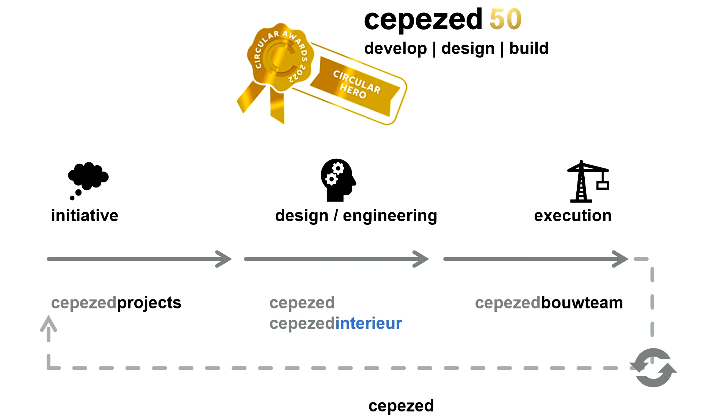And from the discipline of the architect, the designing engineer, we started to get involved in the initiative of the building projects, but also in the building of the actual buildings. So now we have 4 departments within cepezed. One is the project development, which I'm owner and director of. cepezed, the architectural firm, which also has an interior architecture department, and cepezed bouwteam, with which we actually build the buildings.

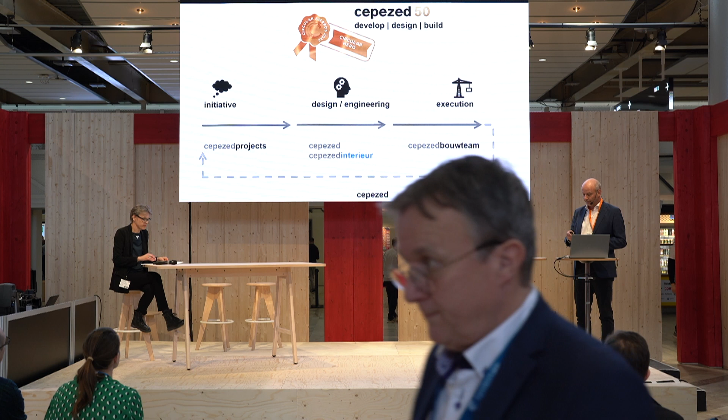And you see also by the dotted line that we start getting buildings that we realized, that we built, back to have new initiatives with them. And those are some of the projects that I'll show you later. We'll get back to that.

2 years ago we were called Circular Hero for that year by the government, because we are very intrinsically motivated to build circular buildings and to make the whole building industry more circular.

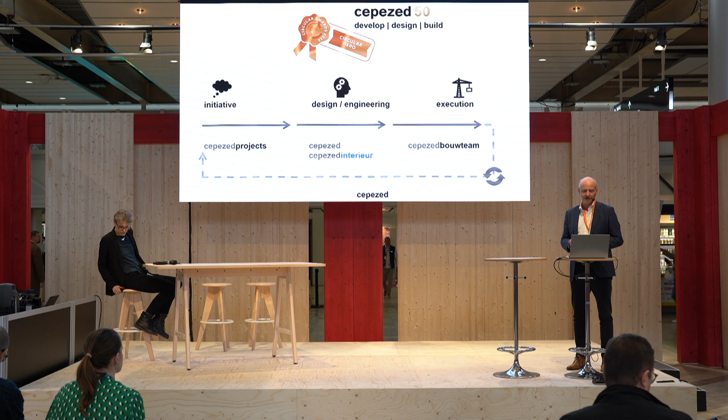I'm also a member of the transition team Circular Building Economy in the Netherlands. That's a team which advises the government how the building industry can become circular in 2050. It takes a lot of effort, but we have direct contact with the government, so we can have some influence on legislation, at least local legislation.

The urgency of why we have to focus on sustainability and especially circularity is displayed in this graph. This is for the Netherlands. I did not have the figures for Sweden available, but in the Netherlands, about 11% of all the CO2 emissions are caused by materials used in the building industry.

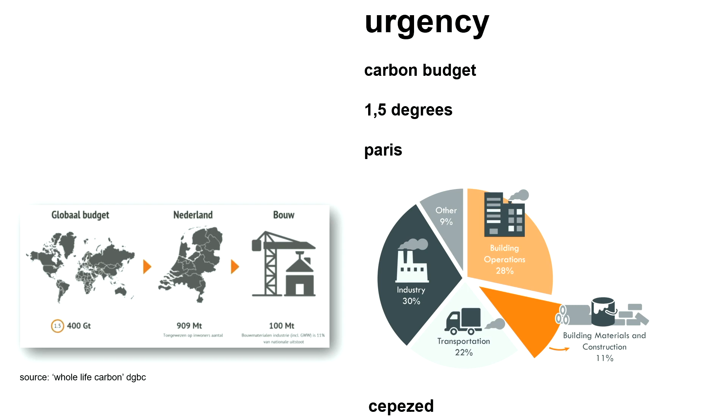So if you want to meet the 1.5 degrees goals of Paris, we really have to focus as a building industry on how we can reduce the CO2 emissions really drastically in the next decades. And one of the things that we can do to achieve that goal is to build more circular buildings, to get the circular economy within the building industry up and running.

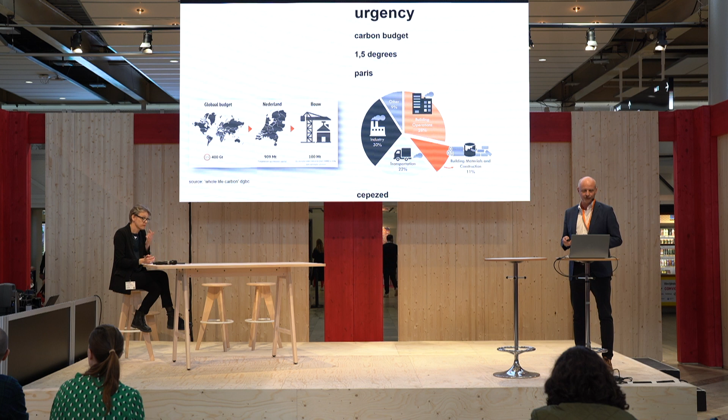I'm not going to talk about architecture itself. I'm going to talk more about how the process is organized for us to make circular buildings. I can talk a lot about the beautiful architecture of cepezed, how we make buildings with a lot of daylight, which are pleasant to stay in. But I'll focus more on the process of getting sustainable and circular buildings. So it's applicable to all different kinds of architectural aesthetics.

The definition of sustainability. This is the definition by the Brundtland Commission from '87, which is very logical, it's an open door. We have to meet the needs of the present generations without compromising future generations. So this is what we should keep in mind whether you make a vacuum cleaner or an airplane or a car or a building, always use this as a starting point for what you're actually going to make.

Do you make future generations happy with your product, or will it be a burden for future generations? So that's a very abstract way of thinking about how your business can be organized.

More into the building industry, we learned a lot from this guy, Stewart Brand. He's an American author who wrote this book about how buildings learn, how buildings get older, and how they get mature over time. And in this book, he has 3 statements which we find very attractive and we use in almost all of our projects. The first one is that all buildings are a prediction.

That means that you are always working in the future. If the client comes to your office, he probably has a program of requirements which was written 1 or 2 years ago, and you're making a design which will be built 2, 3, 4 years in the future. So you're always working with something that is a prediction as an architect or as a project developer. And that's not a problem, but you should realize that as human beings, we're not very good at predicting the future.

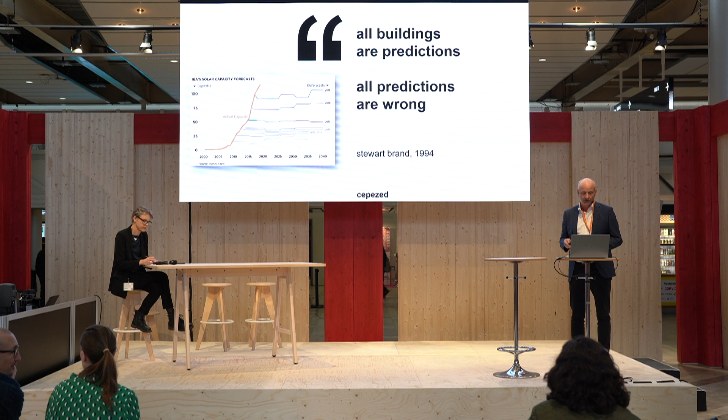I often show this graph, which you see on the left, where year on year the installed photovoltaic cells are predicted, and you see year after year after year it's the wrong prediction. So we should stop predicting and start making buildings that are able to adapt to the future, to future developments, which we don't know what will happen.

And one thing that is also standing in the way of that circular or sustainable development of the building industry is that a lot of buildings that we make suffer, as Stewart Brand calls it, from premature complexity. That means that they are in the initial phase already so complex that during their lifetime it's very difficult to adapt to different circumstances, different processes that will evolve in society. So just like any other organism, a building should start relatively simple and be able to get more complex and more mature over time. And that's something that architects nowadays are not too aware of when they design their projects.

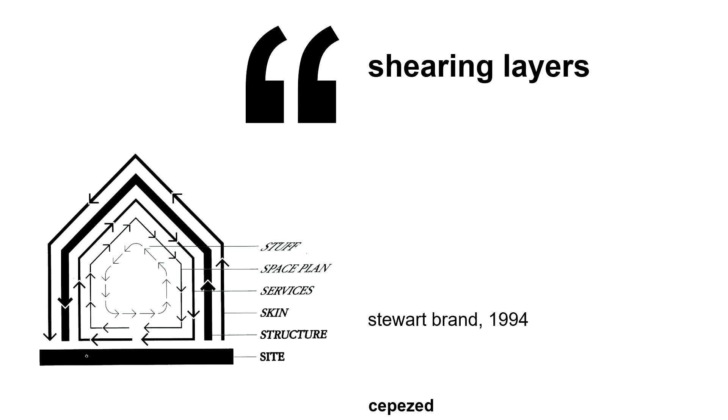The third one Stewart Brand mentioned is the approach when you design your building: you should approach it in different layers of time spans. So certain parts of your building can go on for hundreds of years, and other parts will have to be changed every 5 years, every 10 years, every 20 years. And all those different layers of your building, you should design them according to their lifespan and make sure that they don't interact too much, so that you have to tear down parts of the main construction to change your heating installation, for example. So really keep those different time layers apart.

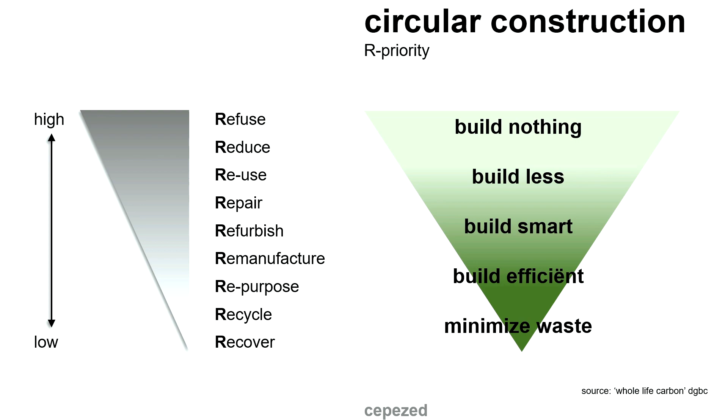So after you decided, do we have to build, or maybe you build nothing, can we build less, with less material? Can we build smarter? Can we build more efficient? And can we build to minimize the waste? So to also minimize the recycling potential.

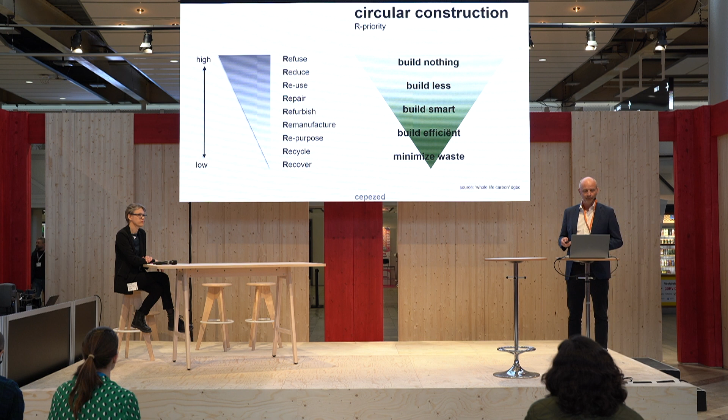But what we build are these kinds of systems, which are very efficient but are not very flexible over time. And we see a lot of these buildings that become obsolete in 20, 30, 40 years. And that's way too short for a structure that should last for hundreds of years. But most of the time, because they're not flexible, they become obsolete in a few decades. So you might say that they're also coming forth from our throwaway culture, where we make and waste our products. So we should get away from buildings that are just once usable in one life cycle.

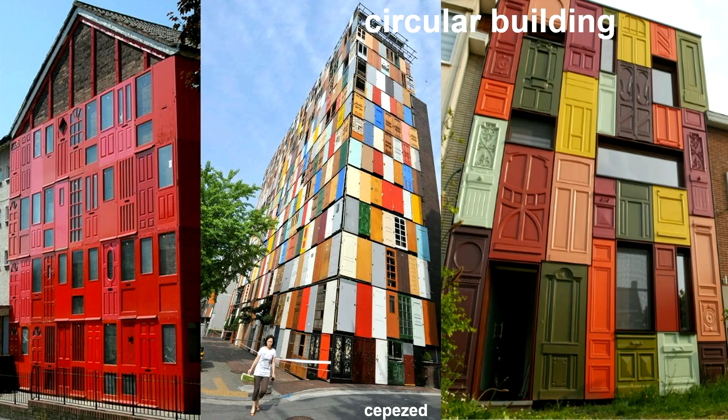When it comes to recycling, there are a lot of very nice projects which make use of old materials, but you should also not confuse this with circularity. These are not circular buildings. These are buildings with recycled second-hand materials, and that's different. I'll come to that later, why that's different from circularity.

And then you see what I just said, that recycling really gets most of the attention when it comes to circularity or sustainability. And we really should focus more and more on making buildings that don't generate any waste. Not while they're built, not while they're used, and especially not when they're not usable anymore and when they have to be changed.

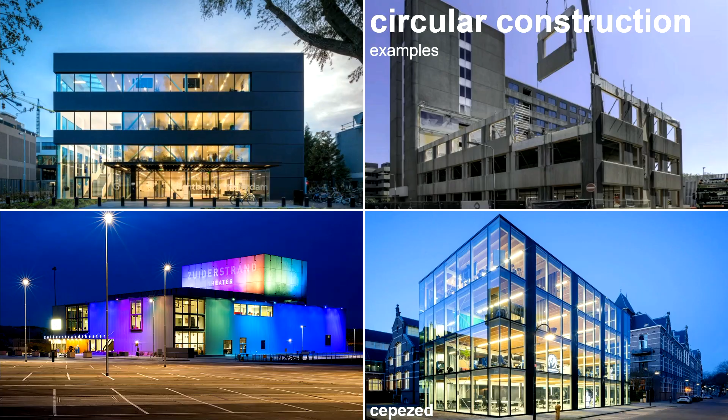So this principle, I'll show you two of our projects where we use this principle. The principle gets a lot of attention in the Netherlands. Recently, we had a visit from our Queen Maxima to one of our building sites, and she's really into circular economy.

And we see that she functions as an ambassador to circularity, and that's very important for us to have all layers in the government, from the municipality to the central government to even the monarchs, getting involved and seeing the interesting parts of the circularity in our projects.

The first project I'll show you is the theater, which was based in The Hague, in Scheveningen, at the sea. It was a temporary theater, and it had to be demolished. So the municipality put out a tender and asked if there's any party who can demolish this building in as circular a way as possible. At that time, we were working on a plan for a theater in the south of the Netherlands, and so we could enter the tender with a new idea of taking down the building and putting it up on a different location in the Netherlands.

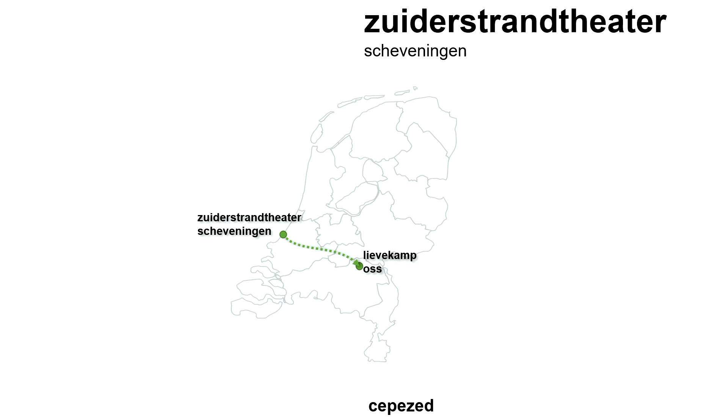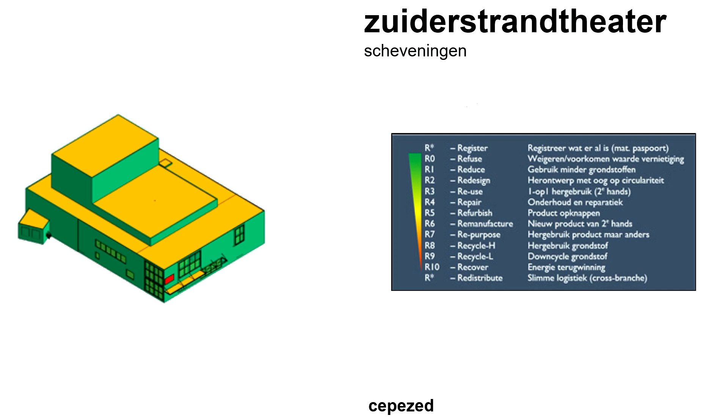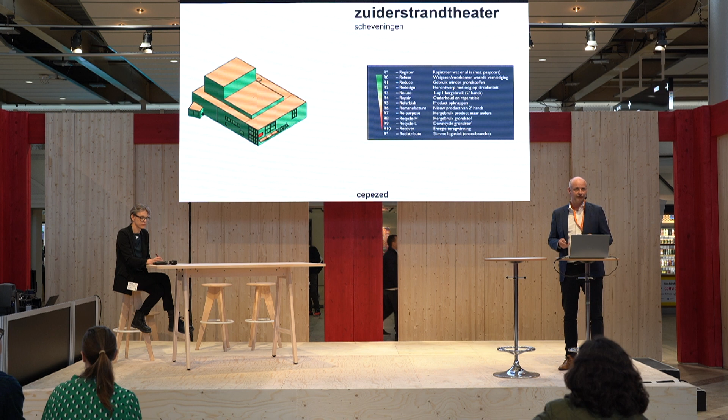So we actually could take down the building, put it on the truck, and move it to Oss, in the south of the Netherlands. It sounds very simple. Obviously, it's not that simple. We first had to analyze the entire building. We had a breakdown of all the materials in the building to the different layers of the circularity index. So which parts can be reused, which parts should be remanufactured, which parts should be recycled, and we had an entire plan of the building in 3 dimensions. It's an entire BIM model to really be able to pinpoint every material, where it's now, and how it will be used in the new location.

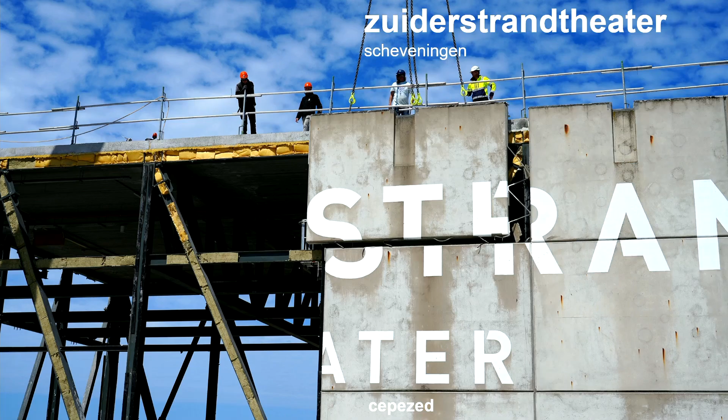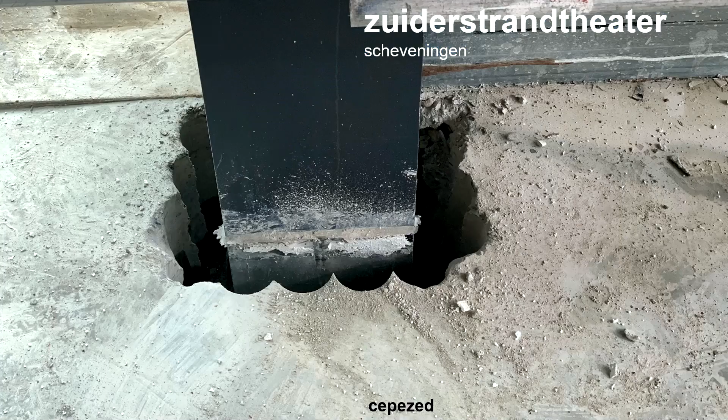Okay, then we put up a team, people tearing the building down, demounting it, so really taking it apart with relatively less noise, less pollution, less dust. So really demounting, disassembling it. The small parts like this, the main stage, consist of all kinds of small materials, which are probably not so well reusable. But the bigger elements, the bigger prefabricated concrete elements of the central tower, are very well demountable and reusable. We had the problem that the building was made as a temporary building, but it was not so well designed to be demounted. So we encountered a lot of details like this one, where we still had to use destructive techniques to get the steel loose from the concrete.

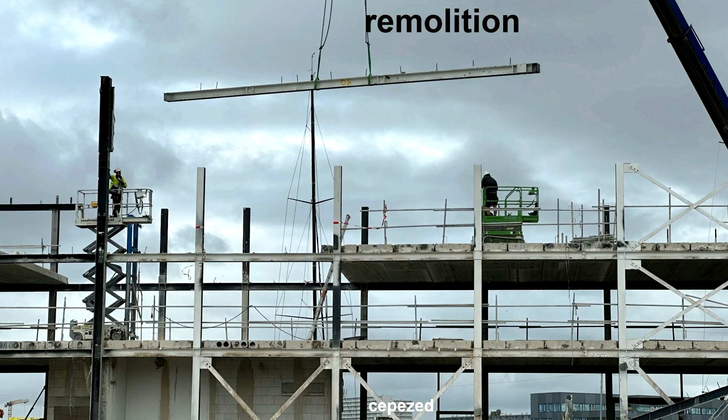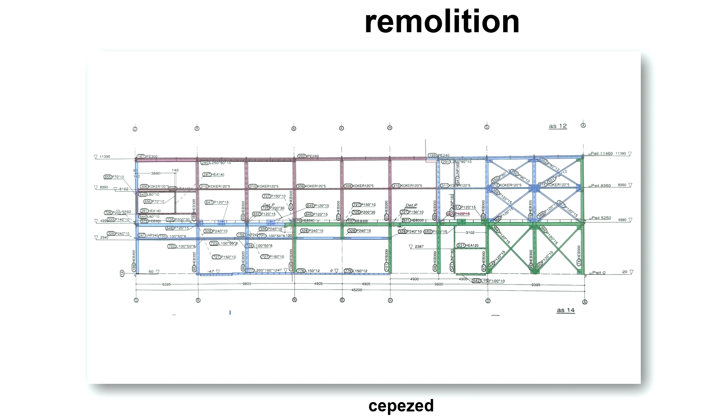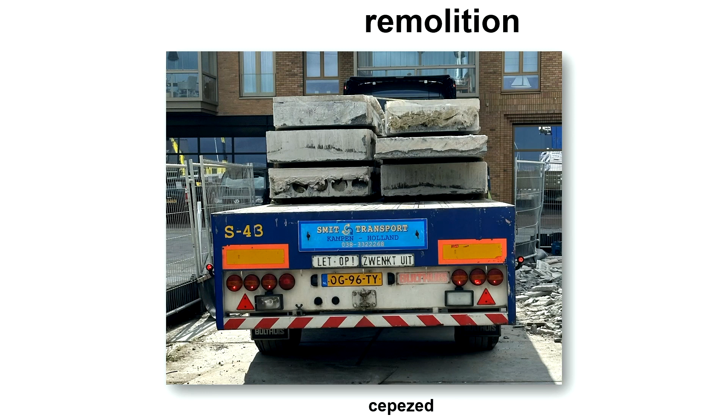But then, when it's loose, you can demount it, put it on a truck, have an entire system of which elements go where, which elements go on the same truck and go in the storage space, so that if you want to rebuild the building, the materials that you need first are not on the bottom, but on the top. Sounds all very logical, but it's more a logistical problem and exercise than a technical one. So every element was coded with a QR code where it says what the measurements are, where it comes from, where it will go to, on which truckload it was transported, and where it will be in the storage space.

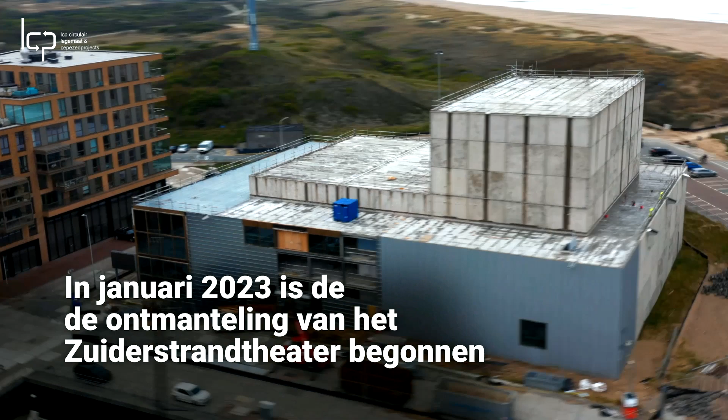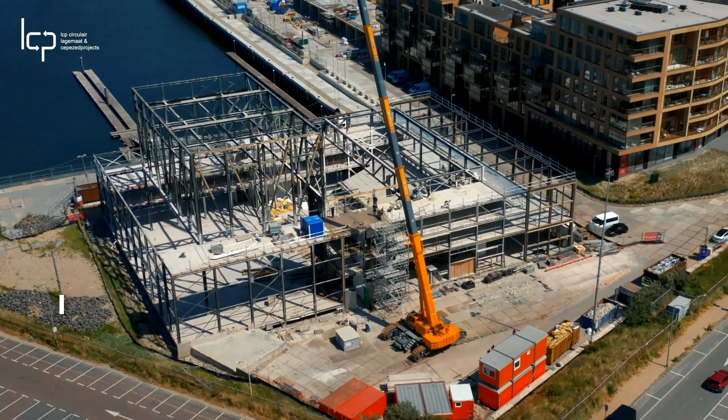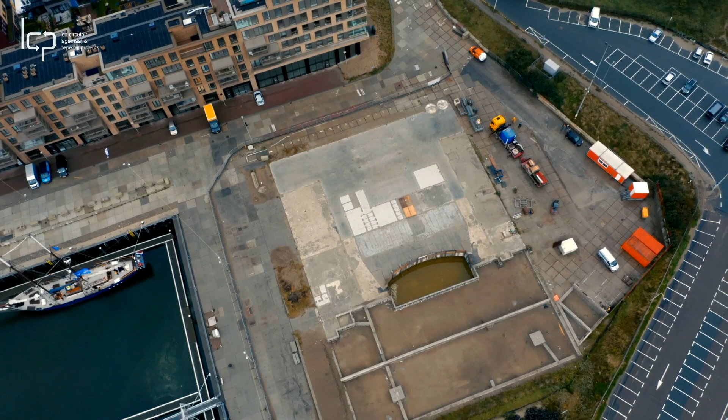I have a short movie. It's in Dutch, with titles. We started in January last year. We demounted; it's really a reverse building process. We started with the small elements in the interior, and ended up with the big elements, the concrete and the steel structure. In September last year, the last elements were moved to the new location, and now this is all that's left over. We could not use the ground flooring, the concrete slabs. That was a fiscal item. I won't get into that too much.

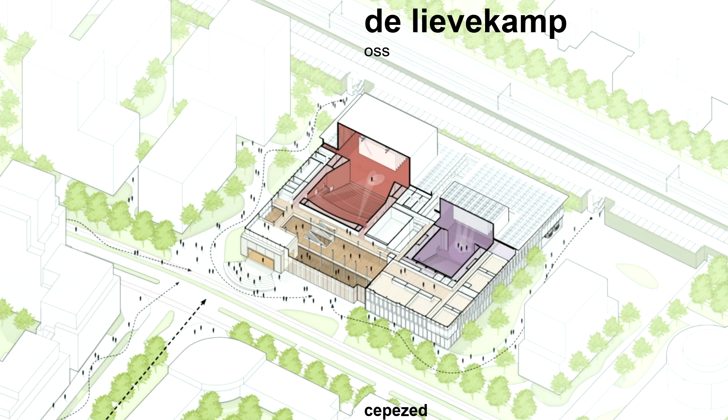And this is how it's now stored in Oss, a storage area in which every material is labeled. We know exactly which element is which. We're building a tent to have the steel covered from the weather. And on the new location, we will build this theater with it, partly from the theater in The Hague, partly from the existing theater that was there on the spot, and partly new elements. And the new elements we will use are mostly bio-based materials. So this will be the first theater which will be CO2 negative when it's actually built, built with about 70 or 80% second-hand materials. A section of the building.

The second project I would like to show you briefly is the project for the temporary courthouse. As we saw, the theater was not designed to be disassembled. We were not the original designer of the theater in The Hague. For this project, we were the developer, the designer, the builder, and also responsible for taking it down and moving it to a different place. A temporary courthouse is a very high-end building. It has a lot of security measures. It had the courtrooms, obviously, but also prison cells. So you could not build it as a temporary building. You should build it really as a permanent building, and that's what we did.

We did not build a temporary building. We built a permanent building which is temporarily a courthouse, and in its second life and its third life it will be able to have a different function.

And how does this process start? Well, normally if you build a temporary building, you start with raw materials, with new materials, you build it, and after the first lifespan you end up with a lot of waste. Obviously this is not a very good way of working. Better is to use second-hand materials and make them into your new building, use them for as long as the building is there, but then after that life you probably will also end up with a lot of waste.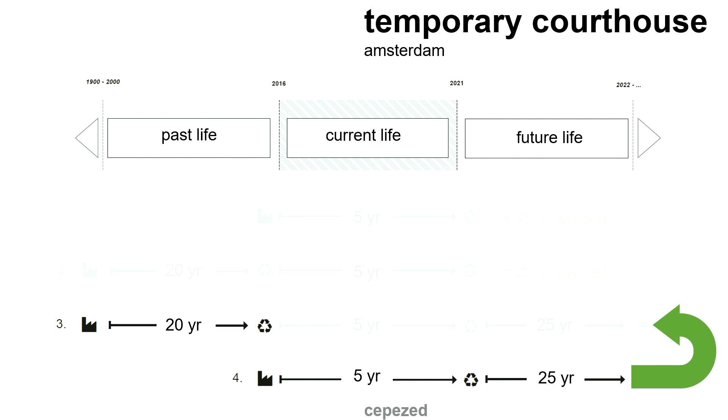So what we did is we applied this scenario where we used almost entirely new materials, but we designed them in a way that they can be taken apart very easily, so that they can be reused and reused and reused again. And if you start it like this, then you start up the fourth scenario. You make new high-end, high-quality materials with good descriptions. You make them available to make new buildings again and again and again.

And we did that by designing the building according to those shearing layers by Stewart Brand. So we have the main structure you see on the right here, which is the concrete and the steel structure. We have the facade in the middle. The concrete and steel structure will be permanently in this configuration, also on the new location.

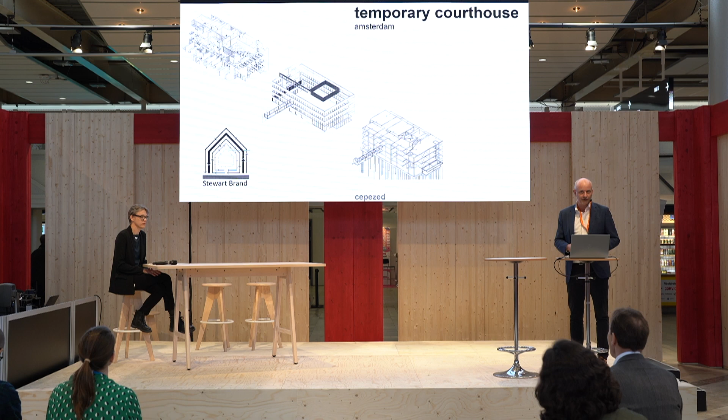The facade is designed in a modular way, so you can change the parts of the facade on the new location to different parts of the facade. So you can alter the building to the local circumstances of the new location, which we did not know in advance. And on the top left, you see all the things that are particularly for the courthouse. A lot of those elements will not be reused in the new building, but will probably be reused in all kinds of different projects.

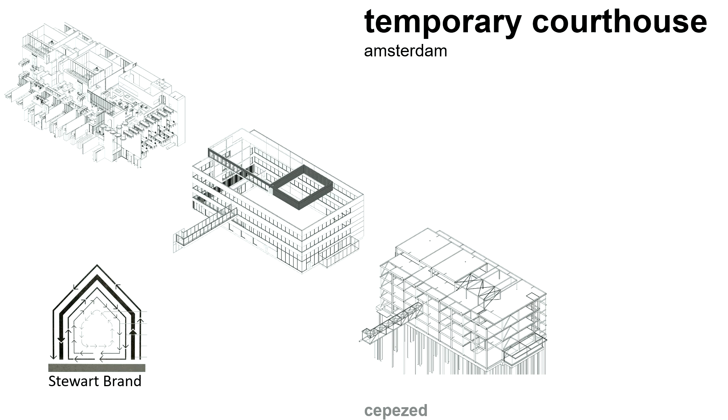And designing in this way, we had to pay a lot of attention not so much to the materials themselves, but to the connections of the materials. So we used steel and concrete a lot, which are very CO2-intensive materials. But once you make them, you should detail the attachments, the joints, in a way that they can be disassembled pretty easily. And we call that circular ready construction.

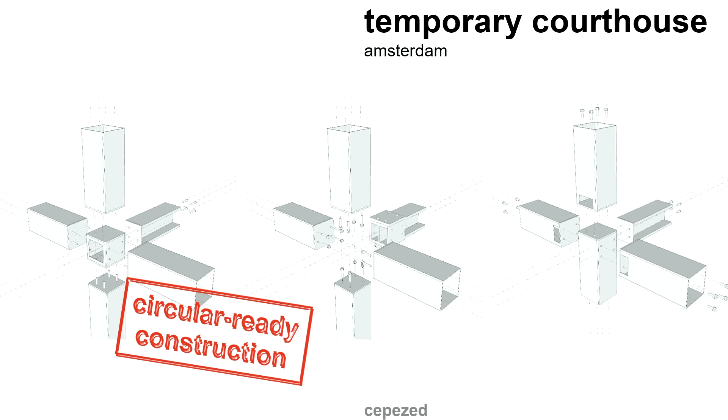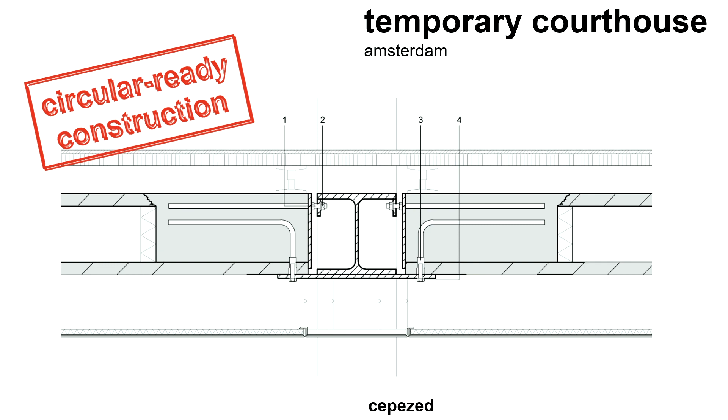We don't call it circular construction because we know it will be circular only at the moment that the building is actually being reused. So we can only make our building ready for that circular economy without really predicting how it will be reused. This is the joint of the concrete hollow core slabs to the steel construction. Normally concrete is poured over the slabs, and then the steel and the concrete become one, and you cannot separate them anymore. So we designed this detail.

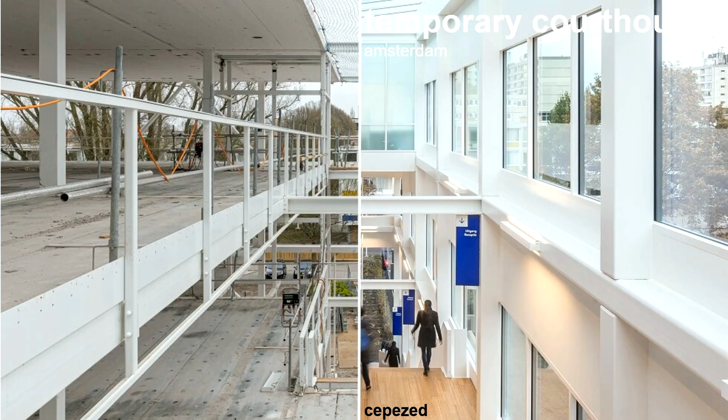We went with this detail to all kinds of hollow core slab producers, but most of them were not interested in working with us because that's not part of their business model. They want to make new hollow core slabs. They don't have the infrastructure to get them back and to resell them again. So we had to do that ourselves. But now, after we did it, most of the companies approached us to develop similar details. So it was nice to see that production partners are really getting interested in making their products more circular.

On this slide, you see on the right the building in use, and on the left the building during demounting. And you see that the whole demounting process is really like playing the movie of building the building backwards. And by not demolishing a building, but demounting it, you work a very clean process with not much noise. It was in an inner city location, so we had limited access for trucks. So by having the whole process planned very minutely, with every element coded with a QR code, we could really influence the entire process and cause little nuisance to the environment.

This is what the building looks like now. The first elements are being rebuilt at this moment in Enschede. That's in the east part of the Netherlands, about 100 kilometers to the east. And there it will become an office building. So it will not become a courthouse again, but an office building. And it was very simple because the whole structure was able to adapt to that new function.

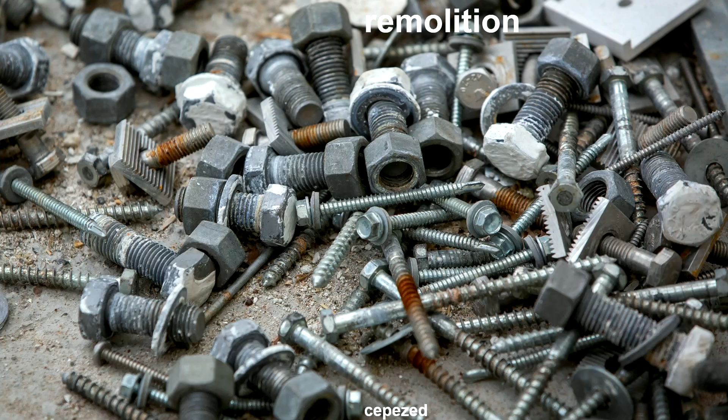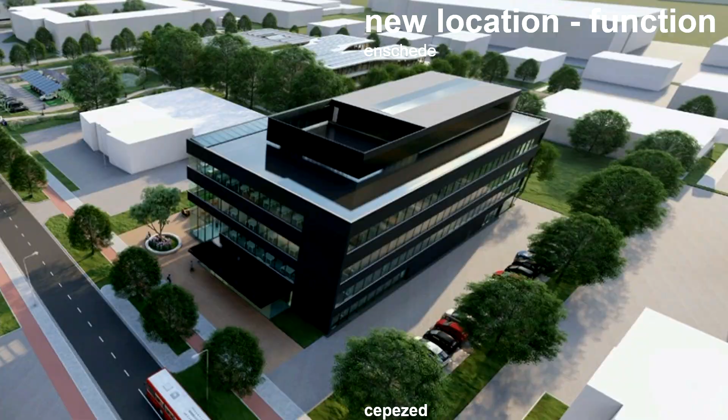And then what's left over are these, the small parts which cannot be reused, especially according to the regulations. These are elements that you have to make new and anew. And when the building is gone, this is now the site where it was, and this will be the site where it will be. Actually, more or less the same building, but only the east and the west facade are interchanged because it's turned 180 degrees around.

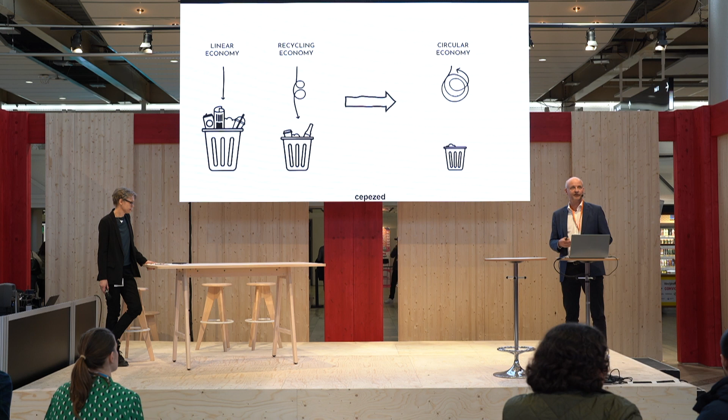So with this project, I'd like to talk not so much about the architecture, but more about the process that we as architects or developers can follow to have more circular buildings. We all know that once we start thinking in linear business models, really approaching the whole building process in a linear way, we will never get to that CO2 reduction. The recycling economy, which has a lot of attention, is obviously very important, but also will not be able to reach the CO2 reduction that we actually need.

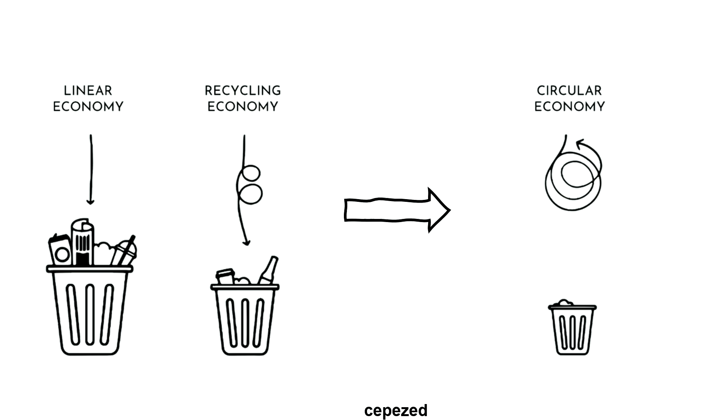We really need to go to that zero waste economy that we call the circular economy, and we can do that by making our buildings suitable for that circular economy, making them circular ready, as we call it, and that is mostly done by the right detailing, thinking about the whole process, really thinking about which materials we use, how we code them, how we do the building information modeling, and in that way we really can work together towards a circular ready built environment. That's where I would like to conclude my presentation.

Thank you very much. We only have a few short minutes. My name is Tove Dumont-Wallsten. I'm here from Architect Sweden.

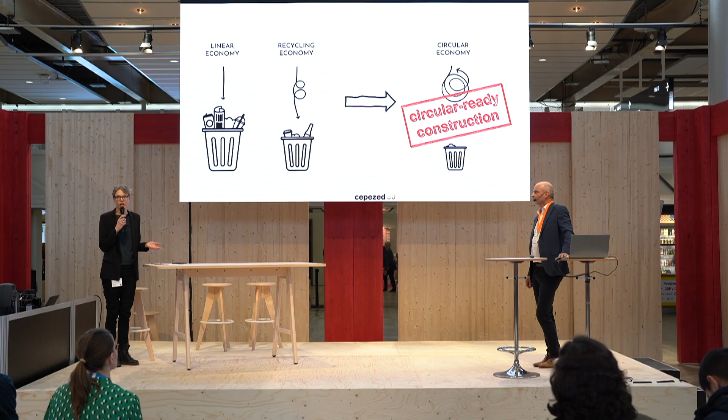And for our profession, as for the whole sector, of course, circularity is a very urgent topic. We need to change the way we build and the impact buildings make on the environment. I would like to pose a question. You work with the circular construction economy transition team, a very ambitious program from the Dutch government. So you work with implementation, and the whole industry should be circular by 2050. It's been described as climbing a mountain, and right now you're putting up the base camp. How do you do that?

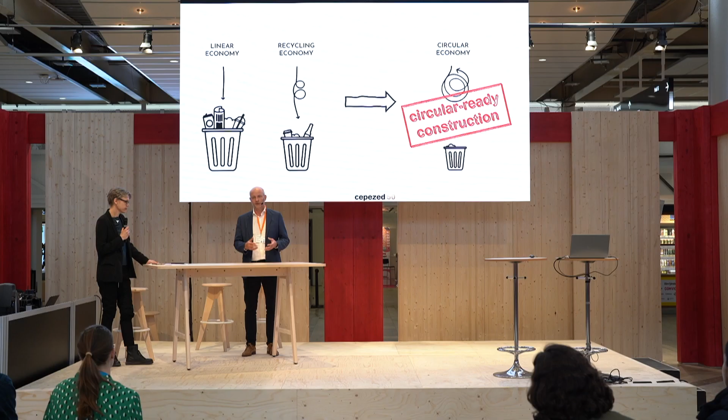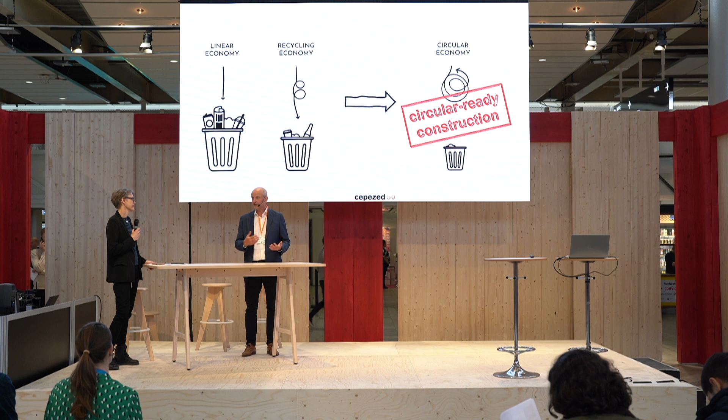We do that in the team, where there are designers, but also universities, municipalities, and also companies. They're all involved in that team. So every aspect of the whole building industry is represented, and we try to work beyond that base camp, which we already established, towards the next phase by advising the Dutch government on how they can steer the legislation in the right way. That goes from very simple advice, that if you design a building, you should also make a plan for how the building can be demounted, how after 5, 10 or 100 years it can be relatively easily disassembled. But we also give advice on tax reform, the problem of true pricing.

Some very polluting materials are still too cheap, so you don't pay the real price for certain materials. But those topics are really broader. They have to be addressed in Europe. You cannot address them only in one country, but you have to start somewhere. So circular business models on a national as well as a European level is a step we need to move towards.

Time is running very short, but I advise you all to look into this ambitious program by the Dutch government. There are a lot of open source reports, guidelines on procurement, on building, and on circular economy and how to implement it in business models. And also look into the cepezed office projects. You have it all in your firm already, from design, the project lead, the architects, the interior, the building, and also the demolition.

Yeah, we have now a joint venture. As a project developer, we have established a joint venture with a demolition company. And if we start a new project, we already involve them so that they know exactly how a building is easily taken apart and how you can keep the value of the materials as high as possible during the entire lifetime of the building. So look more into it.